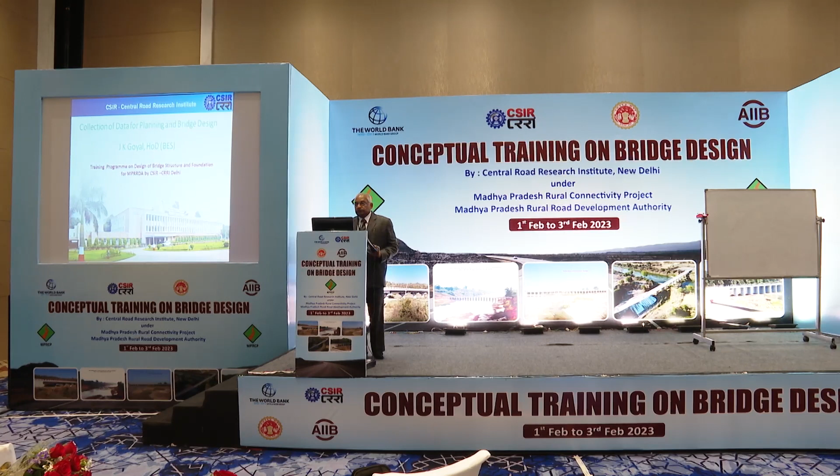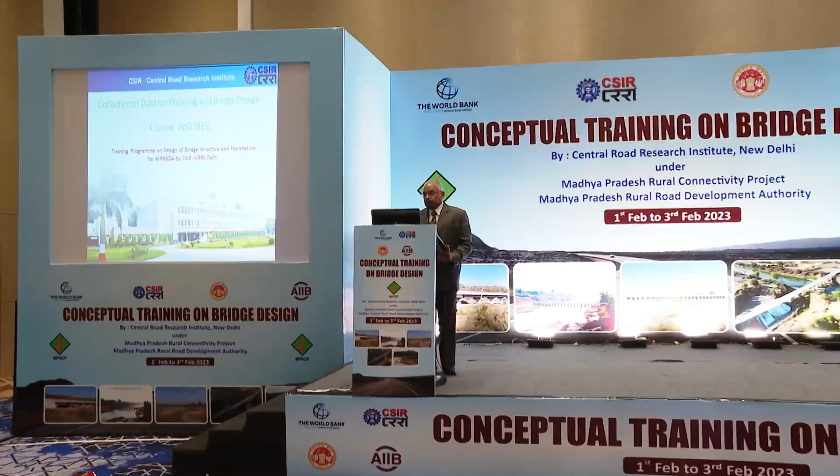Covered one lecture or overview. Basically, the course has been designed to cover the various aspects, and the first session, which is normally the introductory session, has to be on the overall awareness about bridge design and construction. And you will find other lectures also which will be dealing purely on the merits of design and analysis of the bridges. So these two lectures are considered with a view to familiarize you with the overall concept of bridge design and construction.

So I just would like to supplement the query which was raised by one of the participants, that where we use composite construction. Of course, faster construction is one motive, and there are other techniques also which allow you to make faster construction, like segmental construction, launching. There are various launching methods which I will be covering tomorrow. But composite construction is also used to economize the cost at some point. So there are various advantages. We cannot just confine to one parameter.

So composite, of course, is because nowadays we are going for FRP material. FRP material is the future material where you will see a lot of composite construction having the FRP, steel, concrete sandwich. So with that view, composite construction has to be seen.

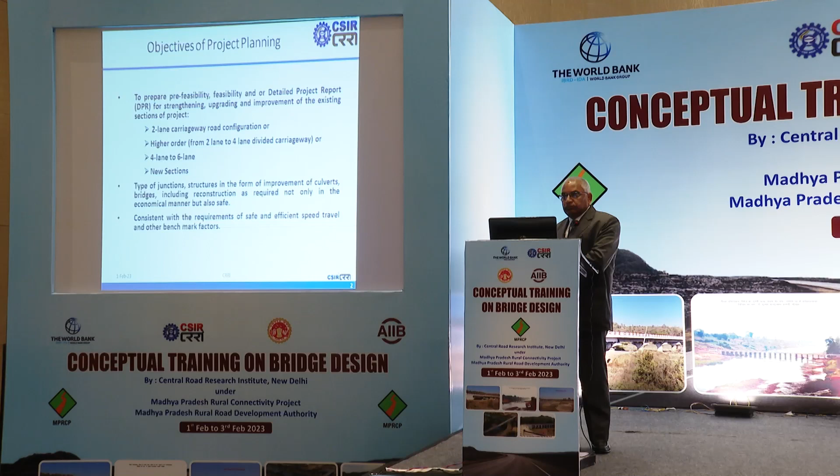So thank you. So my topic is basically the project planning for bridges, and it encompasses various segments of the DPR. You are all practicing engineers. You very well know how DPRs are prepared, but we call everything a DPR, and this is not the DPR. There are three stages in project planning: first is pre-feasibility, then feasibility, then DPR.

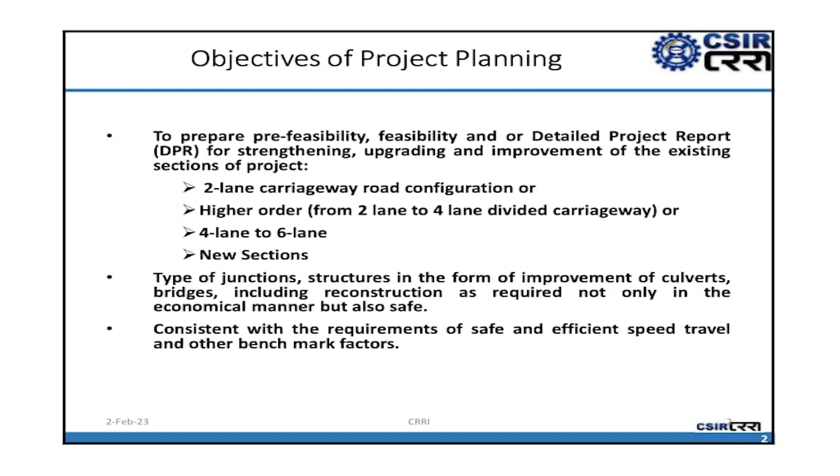So if we have to distinguish between them, you have to be very sure in your mind, because everybody calls it a DPR. This morning also we saw the ACS was saying DPR. But we should be very, very clear what we are expecting from the project preparation. It has got three distinct stages, starting with pre-feasibility. Suppose you have to construct a road of 100 km or 50 km, and we are not sure whether we really have to construct a road, or really go for an expansion plan.

So pre-feasibility just covers the origin point, destination points, existing features of the road, and a rough cost estimate on the basis of your thumb rule. If you have a bridge, you see the existing bridge is not sufficient, I have to discard it, just on the merit of your visual inspection, no investigation, nothing. Just go to the site, make some visual observations, see your urban areas, and you feel, look, expansion is not possible, we have to create a bypass here.

So you are not deciding the length of the bypass, but you simply decide, okay, this is an 800-meter town, so I will roughly need a bypass of around 1.2 km, 1.5 times the length of the existing road. So with all these features, you prepare a pre-feasibility report without any geotechnical investigation, without any traffic study, without any actual cost estimate.

You prepare a pre-feasibility report and go to your authority and say, look, if this road has to be done, my pre-feasibility says that the 50-kilometer road will have some bypasses of around 5 to 6 km, some realignment. These are very old existing bridges, so we need to repair or reconstruct them, and my estimate would be around 200 crores based on the per kilometer cost. So that is pre-feasibility.

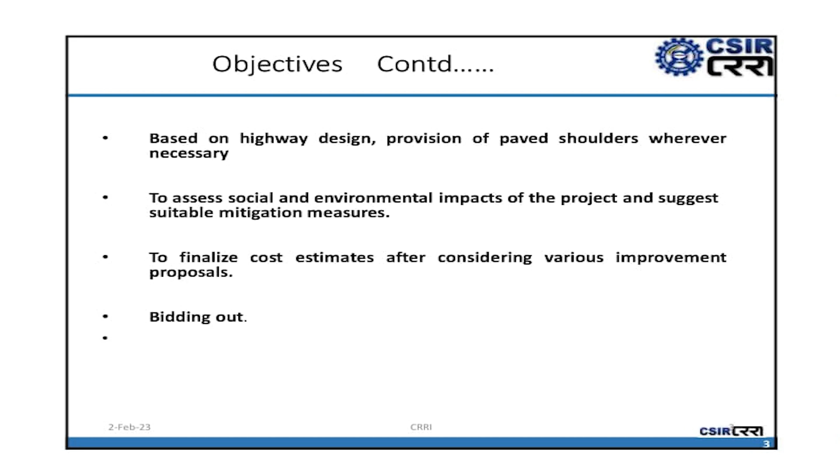This is the essential objective of the project planning, and whatever you plan, it has to be done in a very economical manner and consistent with the requirement of safe and efficient speed travel and other benchmark factors. Benchmark factors are basically your level of service, what level of service you want to decide, whether you want to plan other ancillary facilities. So you decide on certain benchmarking. Like you would like to have a toll plaza, then whether you would like to have an automatic toll plaza, the refinement in your level of services.

Then based on highway design, provision of paved shoulders wherever necessary, that you provide. You assess the social and environmental impacts, whether this is going to create any social hazards, environmental impacts. I'll tell you a very interesting study done after completion of Golden Quadrilateral, what is the social impact it has given on our urban landscape. So that's a very important study. You can just look at the National Highway website.

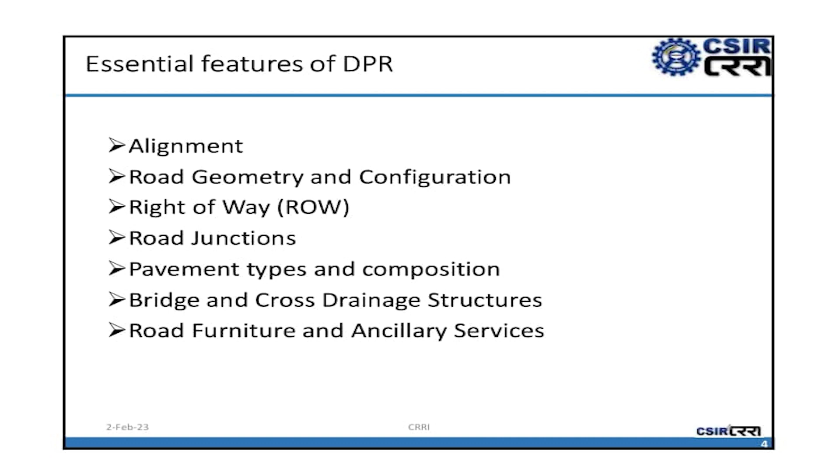So essential features of the DPR, I explained the feasibility also. In the DPR, basically you have the alignment, your alignment should be frozen, the basic alignment along the main line and along the bypasses. So there are two alignments that we have to see, first on the course of main line and another on the course of bypasses or realignments.

There is a difference between realignment and bypasses. Realignment means wherever you have to just tweak your geometry. Your geometry is not correct, like your rural roads, you find at several places that roads are good, but your geometry is not correct.

You are not feeling comfort in driving on the rural road. That is the basic flaw which I see from the point of view of highway engineers, or looking at it from the national highway point of view. In rural roads, the basic problem is your roads are good, but you have so many curves. So if you improve upon it, you can do it everywhere.

You cannot go for bypasses because you have to acquire new land. But as far as possible, you have to remove the reverse curves. You have to see whether the riding comfort is improving or not. So alignment is a very essential feature of any DPR.

Road geometry and configuration, whether it is 2-lane; there is a concept of 3-lane also, which I will not cover here because it's not popular in India. An additional lane is created just to overtake, but it has to be done at a place where there is strict compliance of the rules, which is not possible in India. So an additional lane is not given.

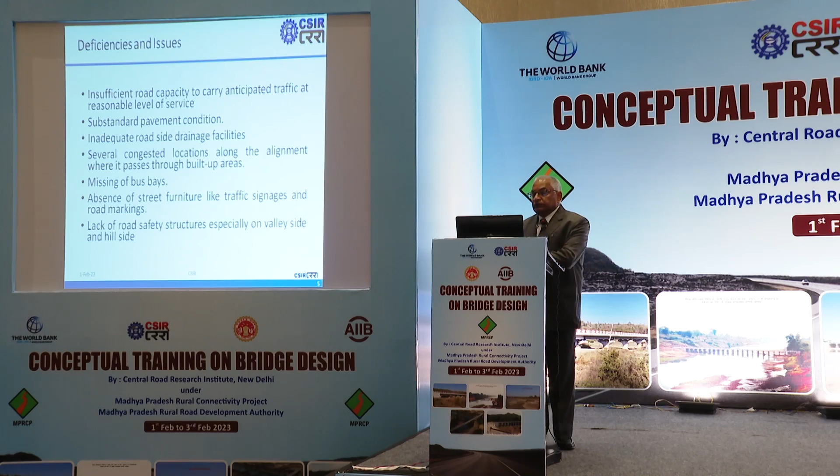Then the bridges and cross drainage structures, of course, are an integral part of any DPR. Road furniture and ancillary services: road furniture means signages, ancillary services means things like the toll plaza, truck lay-by, all these things. Then we also have to deal with the deficiencies and issues involved in making the detailed project report, or in project planning.

Basically, insufficient road capacity to carry anticipated traffic at a reasonable level of service. This is a big challenge on our national highways, because road capacity is something you have to look at. For example, look at urban roads. Urban roads already have something like 40,000 to 50,000 PCU. In Delhi, we have 2 to 3 lakh PCU traffic, and we have no capacity to expand.

In rural roads, when you are improving the road, you look at your capacity. You design for 15 MSA, 20 MSA; your traffic is about 2,000 to 3,000 PCUs. It is not even 10,000. But the moment you improve the road, this traffic is going to increase.

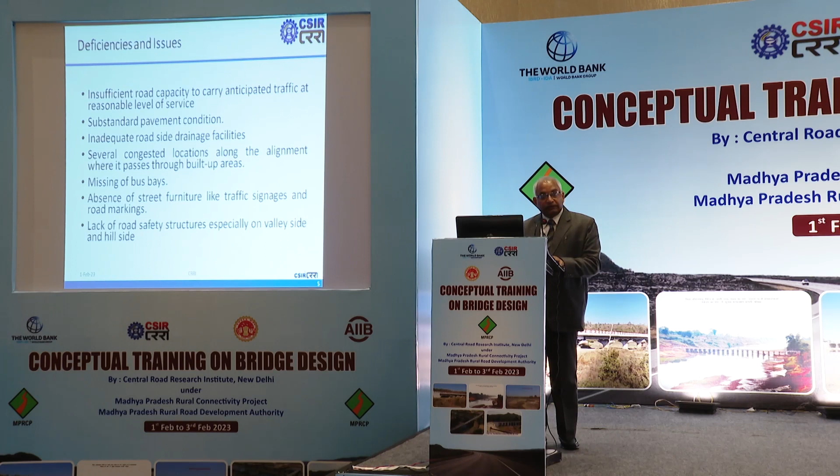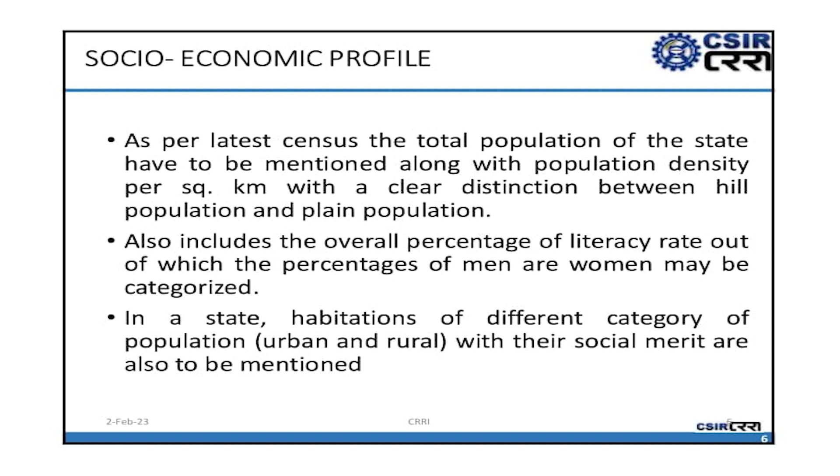And then we come to the socio-economic profile. Any DPR should consider this socio-economic profile. As per the latest census, the total population of the state has to be mentioned along with the population density per square kilometer. I don't know, you may be doing it in your DPR. And also include the overall percentage of literacy rate.

This is very important, because then you have to decide on higher grade of facility. If you have a good literacy rate, you can decide on good educational institutes in that area. So you have to plan your highway accordingly. If suppose the literacy rate is poor, then you have to decide for average type, like primary school, middle school kind of thing. So that way your DPR has to consider all these socio-economic issues in the overall built-up environment.

In a state, there is habitation of different categories of population. I should not say much in this regard, but just think of a situation where you have tribal population, urban population, and other kinds of population, and their habitation and lifestyle is different. So whatever project you plan, you must plan with the taste of the

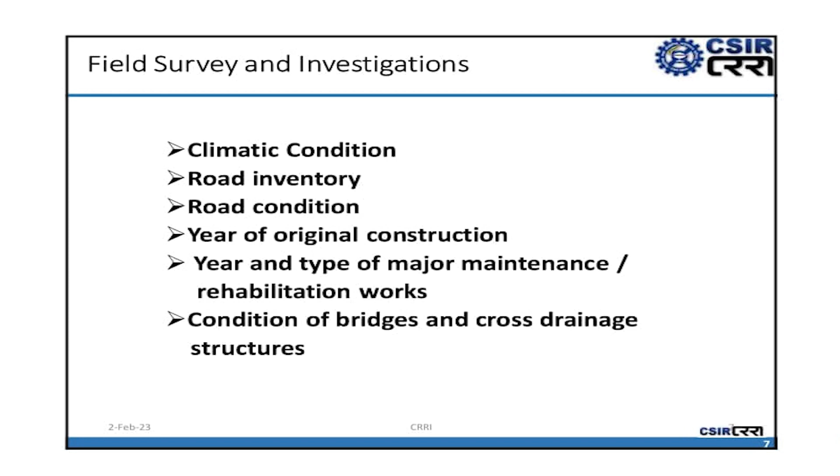I'll just touch upon some field survey and investigations, like climatic conditions. It's very important because any DPR should cover this. We have already talked about it. Now you see the climatic situation, road inventory: whatever existing roadside furniture, whatever roadside assets are available, cover in the road inventory. Road condition, of course, we have to record.

As a matter of record, we have to have the year of original construction. It is very important in the case of bridges, because bridges are normally designed for 100 years. 100 years is a very, very theoretical word. We say 100 years. How many years will we live? We say simply 100 years, but we don't live 100 years. Similarly, your structures.

There are many structures which are more than 100 years old, still surviving. There are many structures which are only 25 years old, not surviving. And we are not designing a structure for 100 years. Who says we are designing a structure for 100 years? It is in the code only. There is no criteria that this will last for 100 years. Nobody has seen 100 years, 75 years, 60 years. But it is a theoretical concept in our mind that, okay, flexible pavement, 20 years, rigid pavement, 30 years.

But if your 30 years traffic has exceeded in 10 years, your road is infructuous in 10 years. That road will not last for 30 years. Similarly for bridges, if your bridge is having high density traffic, it may not last for more than 30 years. Quality of construction is not good, it may not last more than 5 years. But we have to really see that whatever we construct should meet the minimum design requirement.

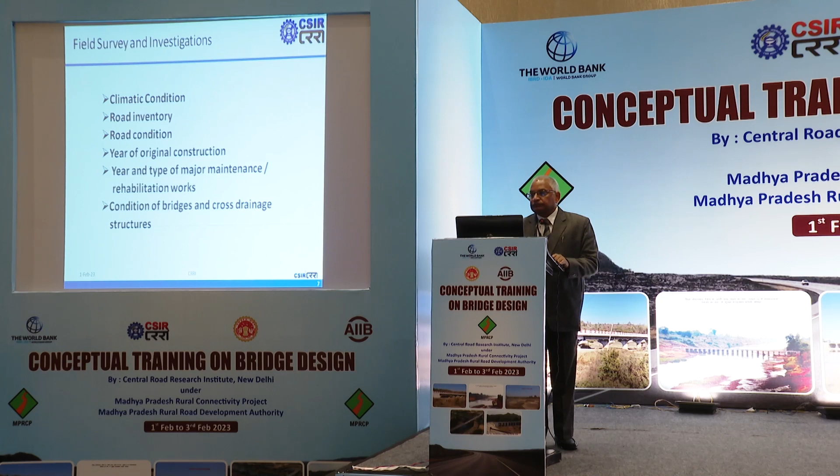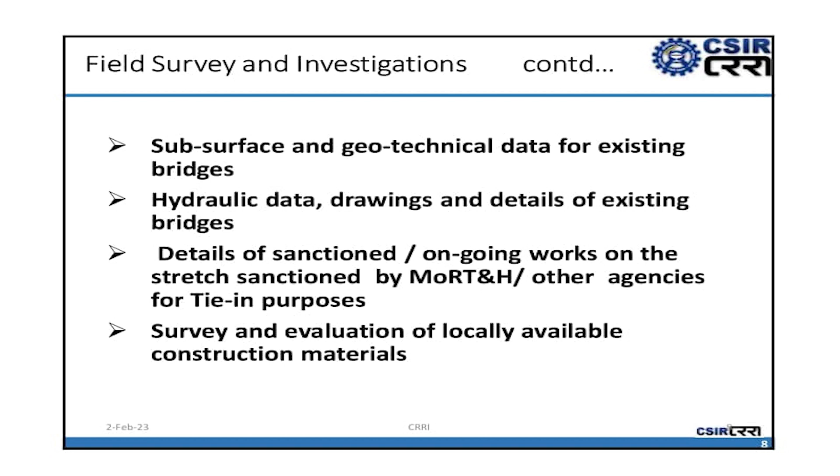Then subsurface geotechnical data for existing bridges. If we talk about bridges, we have to collect the geotechnical data, hydraulic data, drawings, which will be dealt separately. Details of sanctioned ongoing works. This is from the perspective of National Highway. Survey and evaluation of locally available construction material. So this is a very important aspect. Wherever you construct your highway, your DPR must really consider the availability of local material.

Like if you go to Rajasthan, you have the slurry available. If you go to some industrial area, you have the fly ash power plant available. You consider fly ash as your basic input material. Somewhere, if you have some laterite mine available, consider that mine. Mix it, stabilize the soil, that kind of thing. In MP area, you have a lot of black cotton soil. So you have to also see how we can work on black cotton soil. Especially in Malwa region, Bhopal region, Hoshangabad region, you have a lot of black cotton soil, BC soil. So this is a challenge for you.

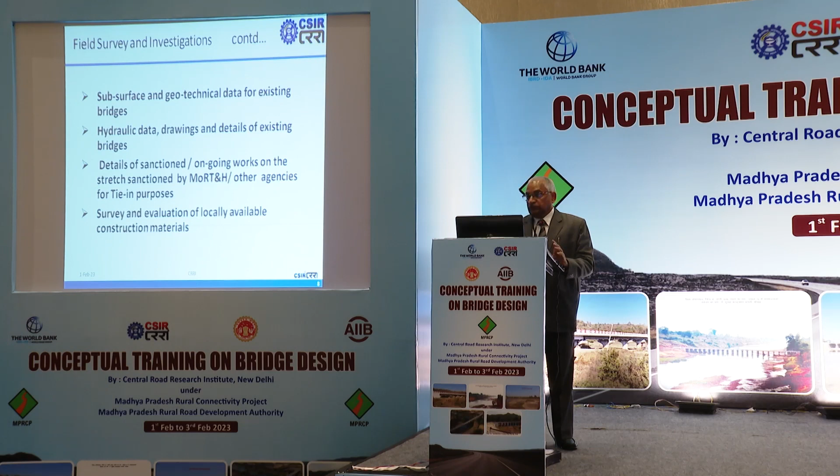Then any DPR should consider the scope of work, which basically includes the construction of new structures along the existing alignment, the construction of new structures along sections of new alignment, and rehabilitation of existing structures. For the bridge DPR, I'm talking of bridges now, for the rehabilitation of existing structures, you have to examine the existing condition, widening and repair of existing structures. In National Highway, we go from 2 lane to 4 lane. Similarly, in your rural roads, single lane to 2 lane. So how to widen those structures? You have to consider whether we should utilize the existing material, the existing infrastructure, or we should replace it.

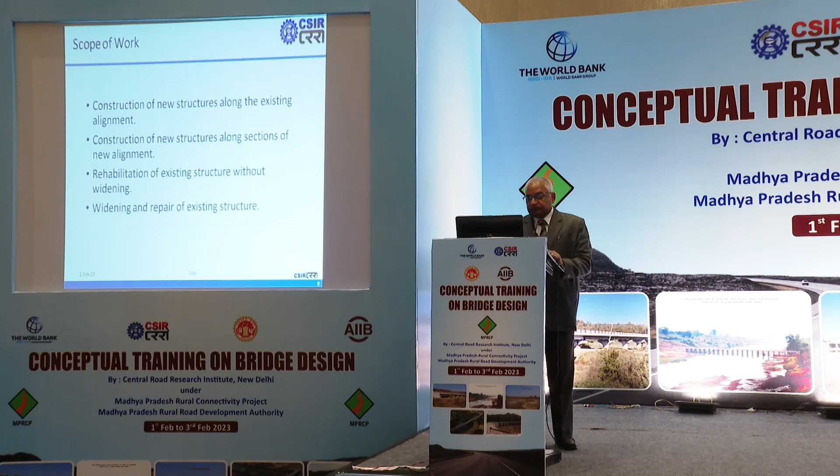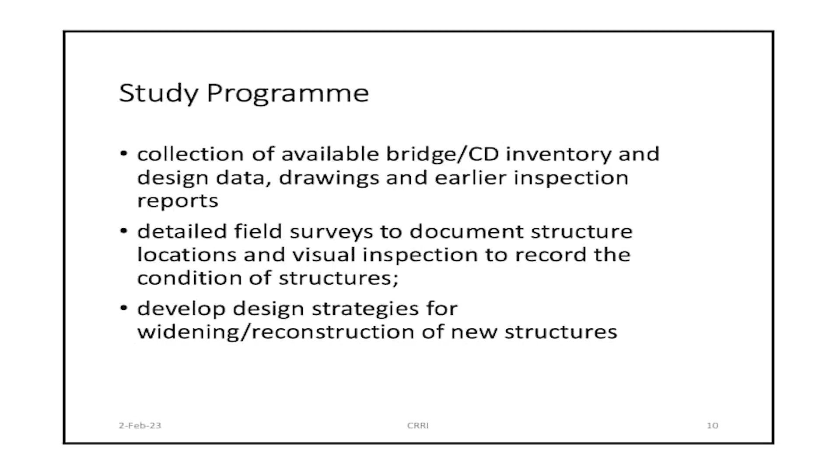So a study program should include collection of available CD inventory and design data, drawings, detailed field survey to document structure locations, and visual inspection to record the condition of a structure. There are standard formats available to record the existing condition. In fact, if you look at the AASHTO code, the American code, they have standardized everything. Unfortunately, in India, we have not standardized. They have given a code to everything, and this is uniform all across the country.

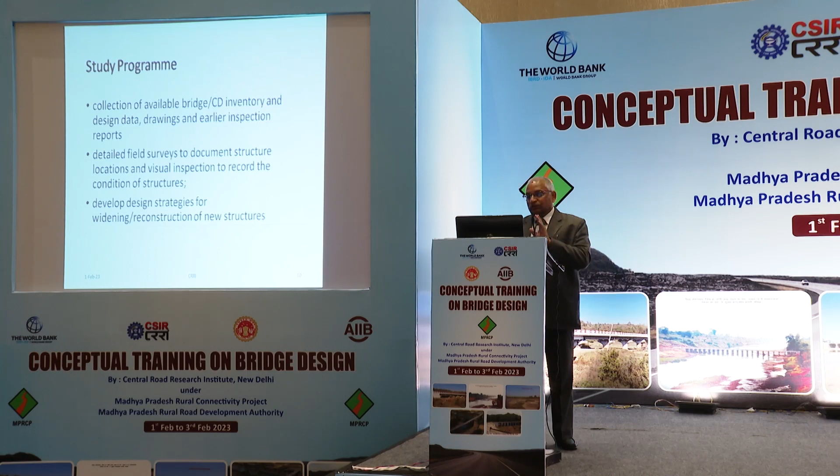Suppose you have a parapet wall, bridge parapet. So you define P102. This P102 will remain the same all over the country, irrespective of state, irrespective of anything. So that way we have to standardize all the inventory, so that anybody who comes next time can simply say, okay, P102 means this. He can immediately connect with it. Then accordingly you develop the design strategies, whether to widen or reconstruct the new structure.

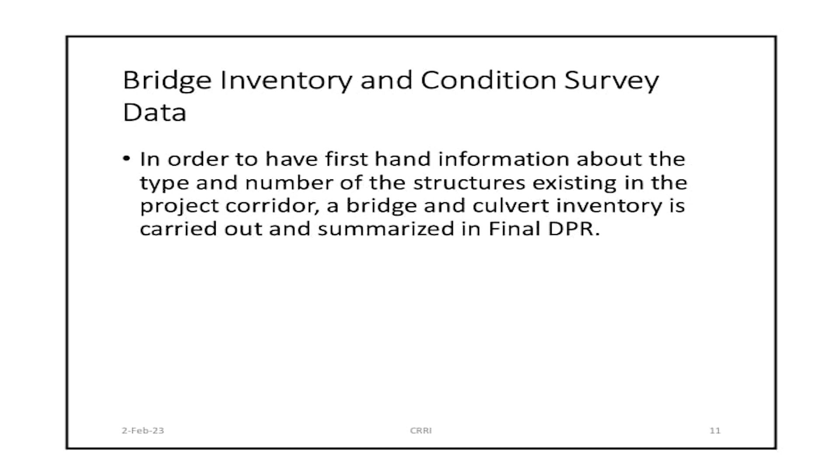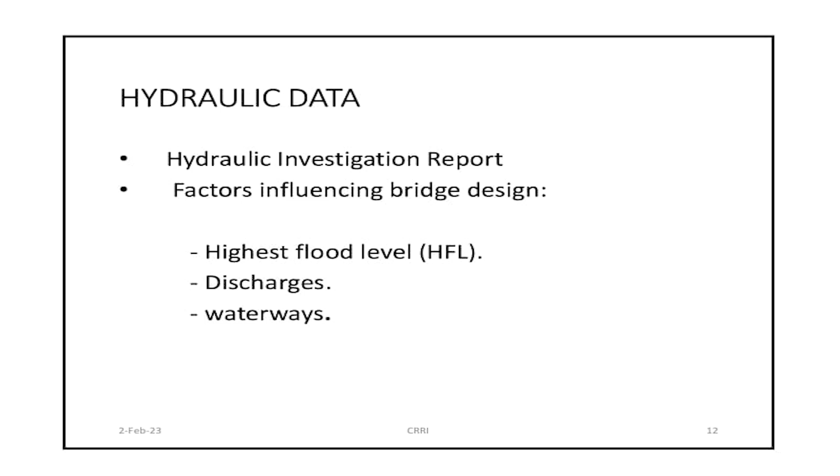Hydraulic data, of course, the hydraulic investigation report is very important, a very essential feature of the bridge. Factors influencing the bridge design are basically HFL, discharge, waterways. These are the three principal parameters that we have to be sure are recorded properly.

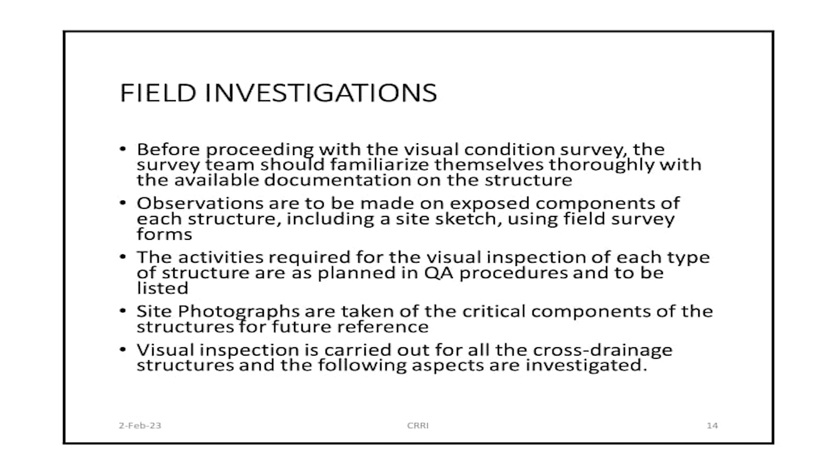Then for bridges, before proceeding with the visual condition survey, the surveyors should familiarize themselves with the available documents of the structure, the existing design; if it is available, you consider that design. Observations are to be made on exposed components of each structure: note down the condition, take the photograph, record it. These days you have the GPS phone, so that way it is easy.

Then activity required for visual inspection, for each type of structure, plan in QA procedures. And better to have a quality assurance plan. For anything that you start with, you should have a quality assurance plan. Site photographs for the critical components of the structures like bearings, like expansion joints, which you cannot access; nowadays we have drones available which can access the critical components of the bridge. So all these things you have to do under the field investigations.

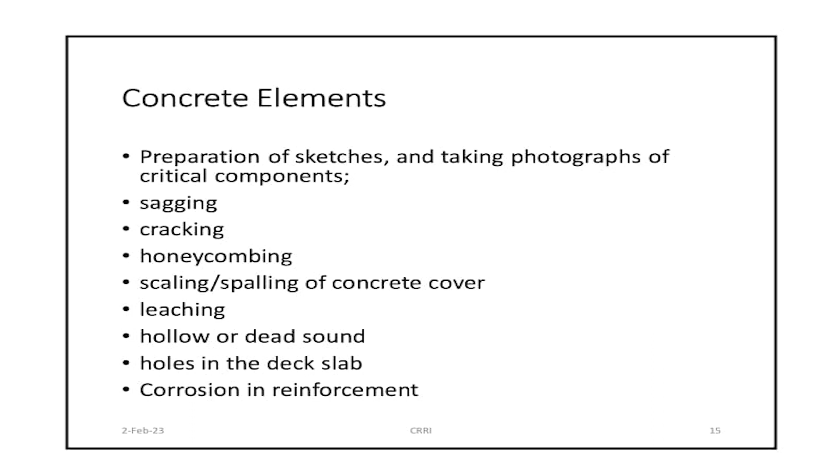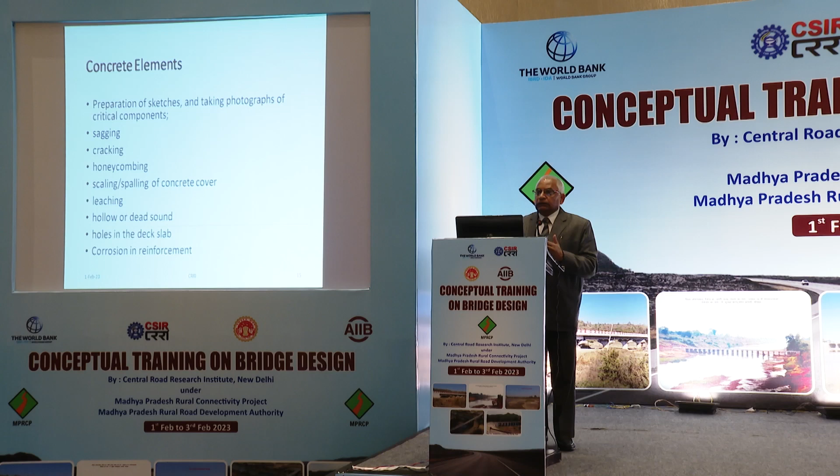Then corrosion in the reinforcement, it's a very, very common feature. If you do not compact concrete properly, if your cover is not proper; and our codes have also been revised. Earlier we used to have 40 millimeter cover, now it is 70 millimeter cover. Earlier we were not using galvanized bars, we were using simple bars. Now we are using galvanized bars. So you find a lot of corrosion in the reinforcement, and you can see the existing bar diameter has been reduced because of the corrosion.

Then steel elements; I was talking of concrete. There are steel bridges also. In steel bridges there may be geometrical inconsistencies because of replacement of a few sections. You can find ISMB 150, then immediately see ISMB 125 or 100 because of the cut and paste. Inspection of joints has to be done very, very carefully, because if your joints are not proper, if it is a bolted joint or riveted joint, over a period of time this joint becomes loosened, and your rivets or bolts

fall down, you have to look for that, because this is the most critical problem we find in all the rail over bridges. Wherever we go for inspection of rail over bridges, which are composite construction, you find a lot of bolts are missing. It is our misfortune that we don't go and see there. If you just go to any ROB in Bhopal or near Bhopal, take a case study. Just go, 5 or 10 engineers, and see. You will find a lot of connections, a lot of bolts missing, just because the bridge is continuously vibrating.

Paint defects: there is a whole chemistry behind it; whatever paint spray we are doing has a certain life. So you can see the defects, corrosion of course, and corrosion leads to sectional loss. This is very detrimental to the health of steel bridges if your section is losing the desired width or depth. Then missing elements. There may be structures where one whole element is missing, like bracing. You go and you don't find bracings there, which are very important.

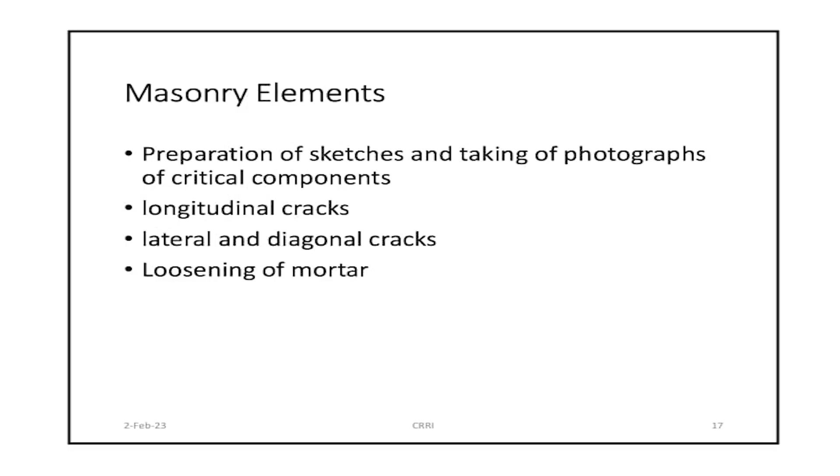And masonry elements, you just take the sketch, prepare your photographs. You can see longitudinal cracks, lateral and diagonal cracks, especially in arch bridges, loosening of mortar. All these defects you can see in the masonry elements. So these are the 3 elements, concrete, steel, and masonry, for existing bridges.

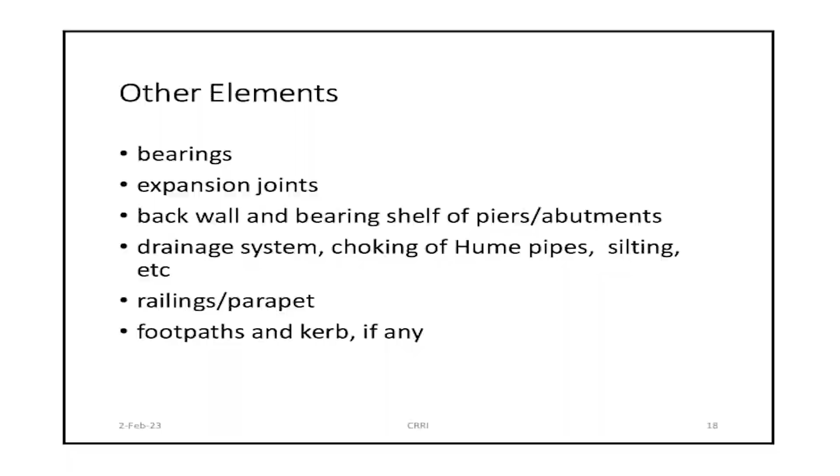Other elements, of course: bearings, expansion joints, back wall, retaining wall, drainage system, choking of Hume pipe, silting, railings, parapet, footpath and kerb. These are basically ancillary components of the bridge, but you have to record each and every component in a very careful manner, because everything has its own merits.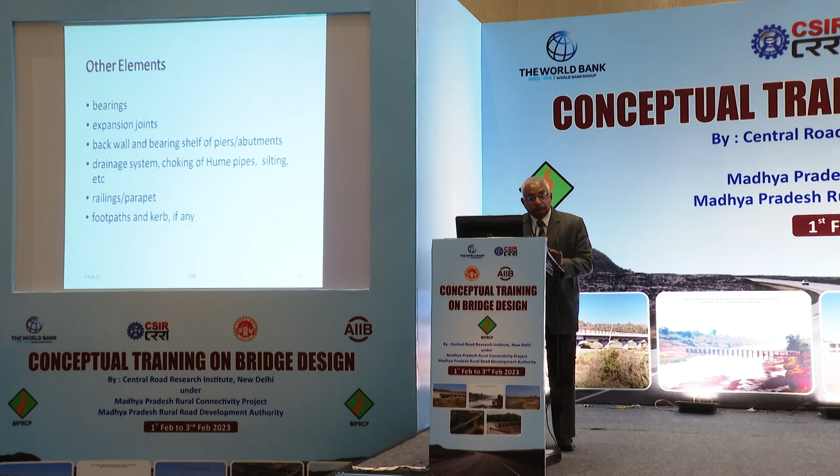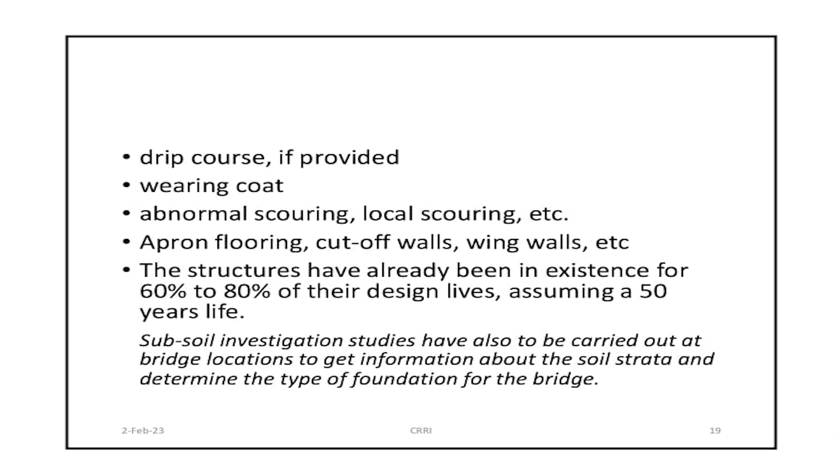Then, of course, the wearing coat on the bridge, abnormal scouring. If it is a high flood bridge, you can see the flash flood. In case of flash flood, you can see the scouring. Nowadays, scouring is also happening because of unauthorized mining.

This mining has become a major issue, because nobody is paying attention to it for certain administrative reasons. But mining is one thing which is spoiling your entire infrastructure. Whatever infrastructure you create, the mining people come and do the overloading, and your existing road network is getting defunct. Same way, if you go to rivers which have high pebbles, like the Chambal river, which has a lot of good sand, you find mining happening everywhere, unauthorized mining.

Mining is a good thing, but it has to be done properly. If it is done scientifically, it is a boon to the river. If it is done unscientifically, then your entire bridge is going to collapse. You find all the scouring, all the mining taking place underneath the bridge. I have seen at many locations where you have a dharamkata underneath the bridge. Government dharamkata. So this is very detrimental to the life of the bridge.

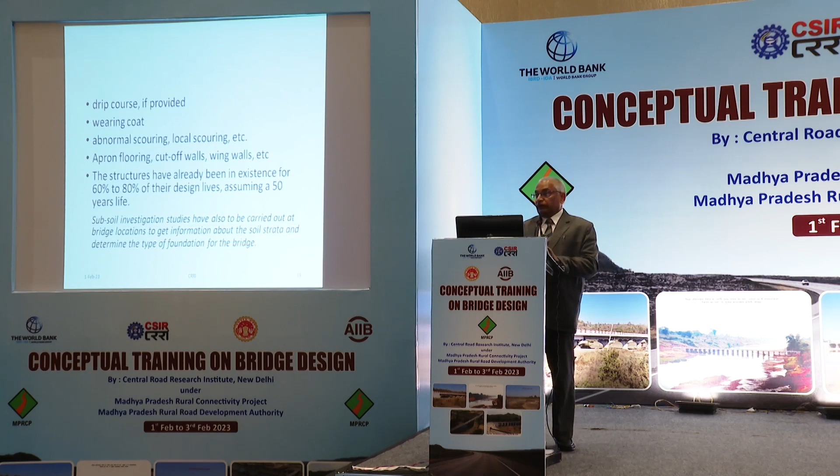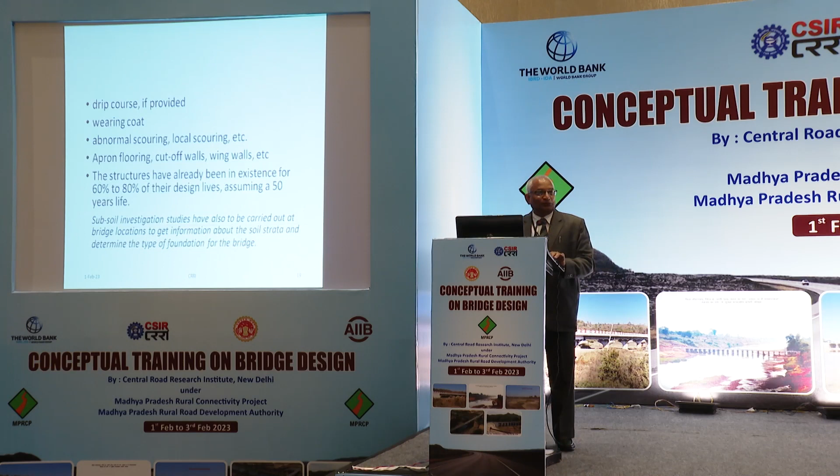With scouring, even if your bridge is very good, your superstructure is absolutely fine, your bearings, parapet, bearing course, everything is fine and well designed, if there is scouring and there is a tilt, you have no option but to replace the bridge. There are many examples. There is no dearth of examples.

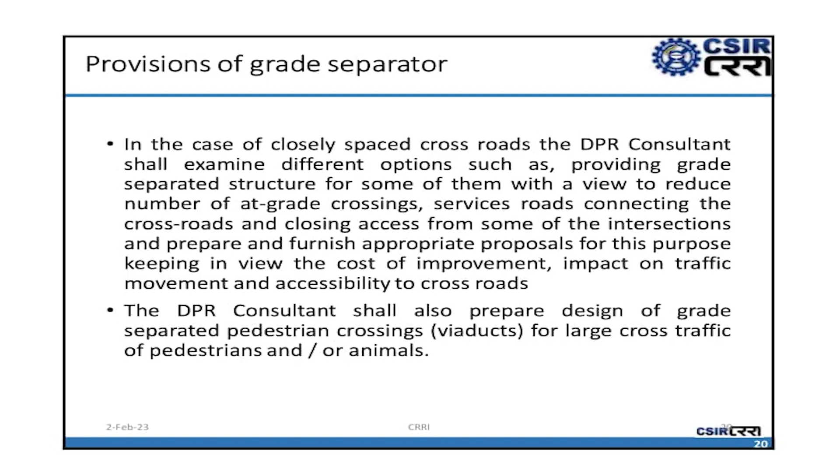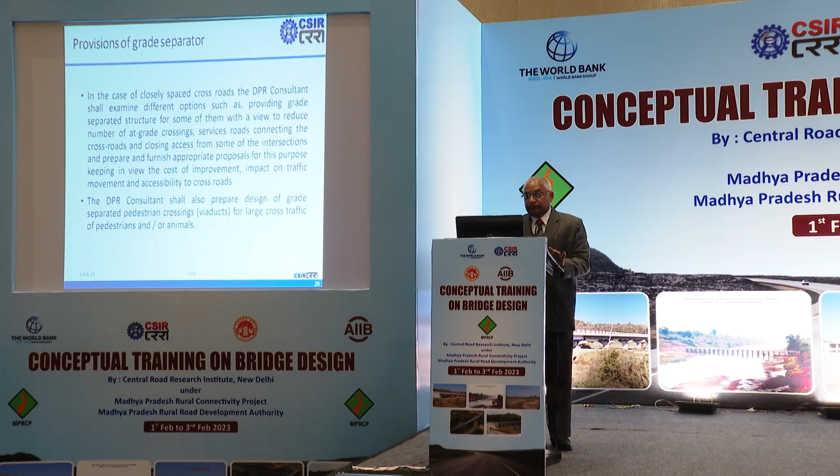Then, of course, in a National Highway DPR, to segregate the traffic we have provision of grade separators, which lead into the various design aspects of the bridge. So we have to look at the choice of at which point we want to divert the traffic for service road, for cross road, for closing access, whatever it is. Then for pedestrians, viaducts, all these things we need a grade separator, trumpet junction, like you have on national highways.

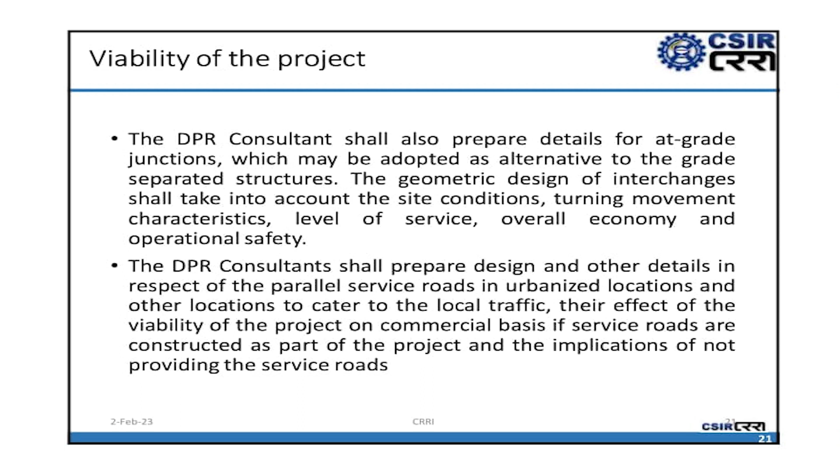Then the viability of the project. When you have done all this engineering, you have to see whether the DPR which you are preparing is viable, whether the government has got money or not. So for the DPR consultant, one of the objectives is to prepare detailed at-grade junctions which may be adopted as alternates to grade separator structures, and geometric design of interchanges. So you have to see whether the project is viable.

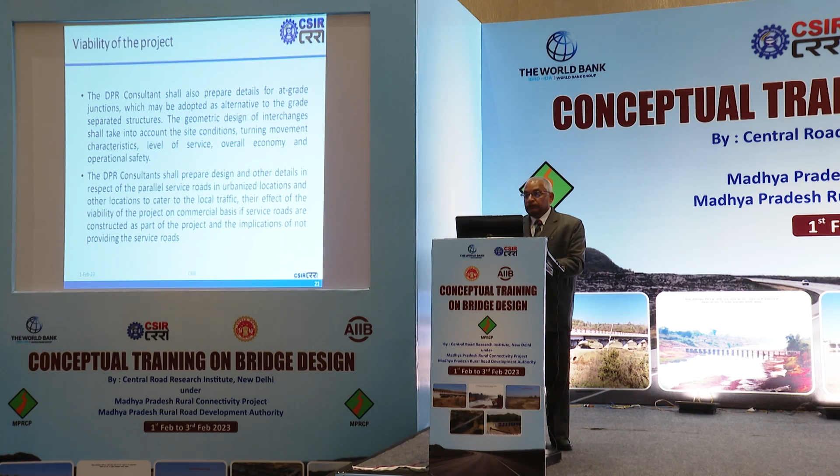And viability comes from the economic analysis. Assess the capacity of the existing road and the effects of capacity constraints on vehicle operating cost. Vehicle operating cost covers a lot of factors. It is not determined just like that. It covers a lot of economic factors: reduced congestion, travel distance, condition of the vehicle, traffic pattern, everything.

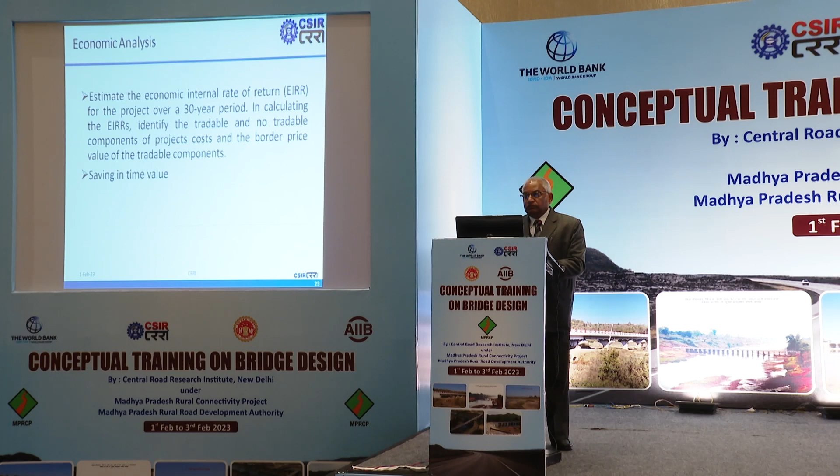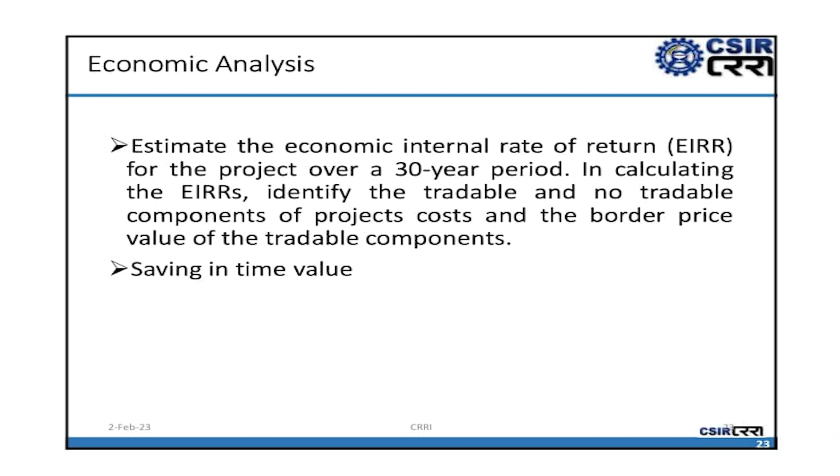Then we calculate the very famous EIRR and FIRR. If you go to any bureaucrat, he will ask, what is EIRR? What is FIRR? Any chief engineer going to his boss will be asked, what is EIRR? What is FIRR? So you have to explain what your cost is, what rate of interest you consider, what the NPV, net present value, is, and how your investment will be returned. Then they decide the mode of execution, everything.

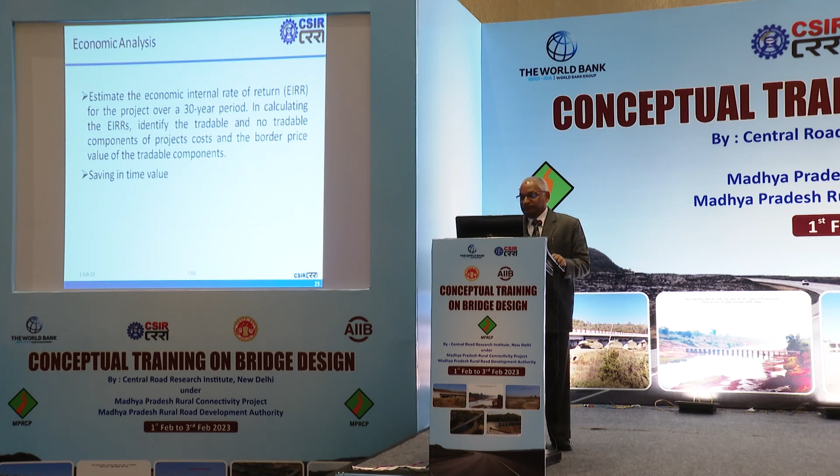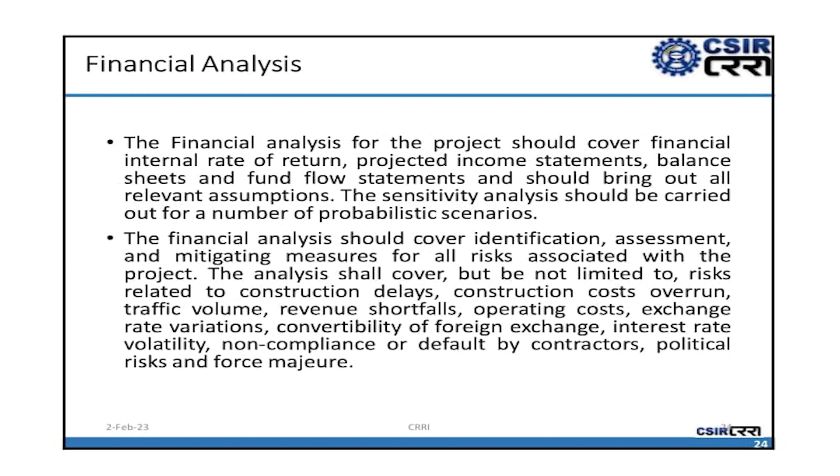Then financial analysis, which is the job of a financial consultant, but as technical people we give input to them: this is my cost, this is my traffic, this is my tollable traffic, this is my untollable traffic. All these parameters you give to the financial consultant: the rate of toll, the willingness to pay the toll, the traffic leakage. All this comes under financial analysis. Then financial analysis will decide whether this project is viable under a particular mode or not.

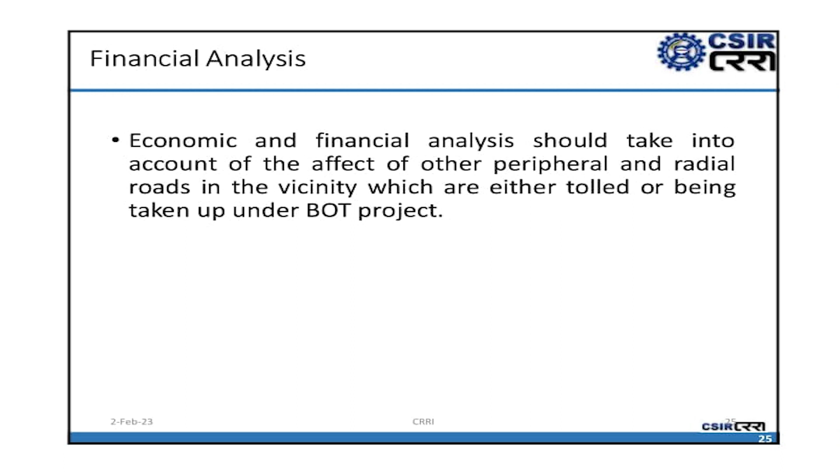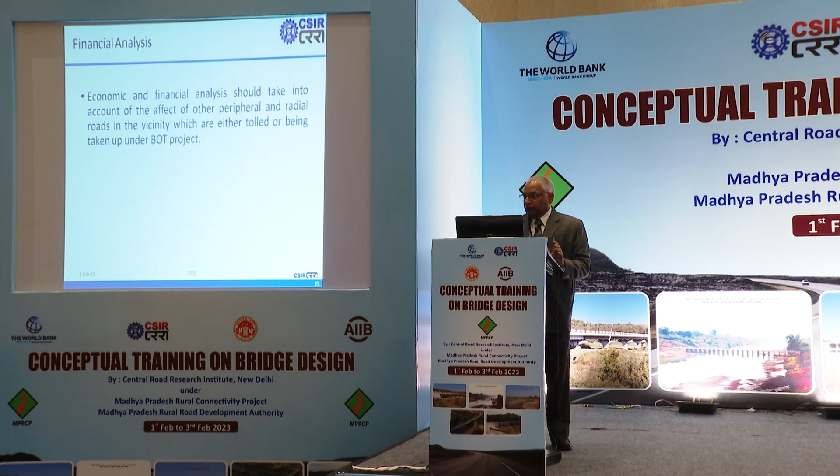That is how they decide whether this project will qualify for BOT. In BOT, build operate transfer, we have considered a 40% grant. If your project cost is 1,000 crore, the government is willing to pay 40%, 400 crores. If it is not viable under toll and the gap funding comes to more than 40%, then the project is not qualified. That means you don't have commercial traffic, you don't have much toll available on the road.

Then you go for annuity mode. Annuity mode means your investment of 1,000 crore will be returned by the government in 6-month installments, covering your original construction cost, investment, and the interest on your investment, NPV value, and whoever quotes the lowest annuity will get the project.

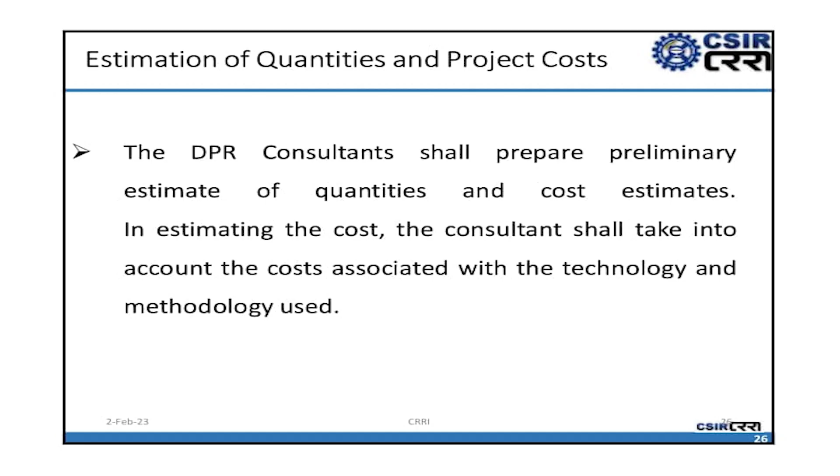Now we are having hybrid annuity project. Hybrid annuity project, these days in NHAI, they are awarding most of the projects on hybrid annuity, where you have gap funding as well as the annuity. Both the things are sandwiched together.

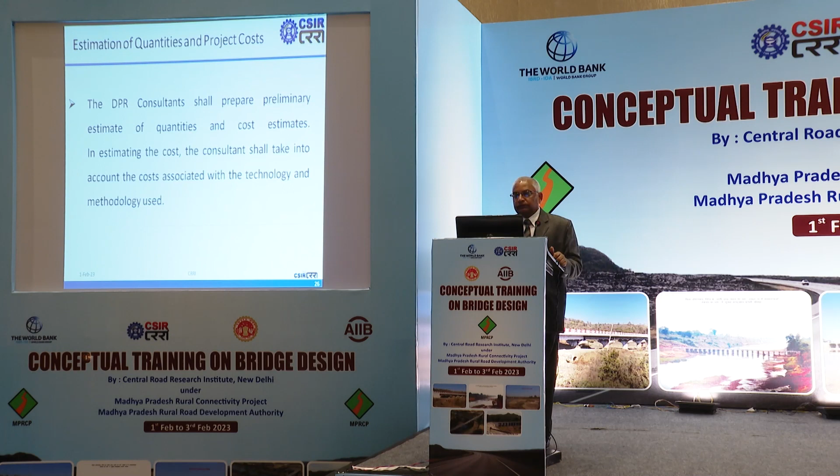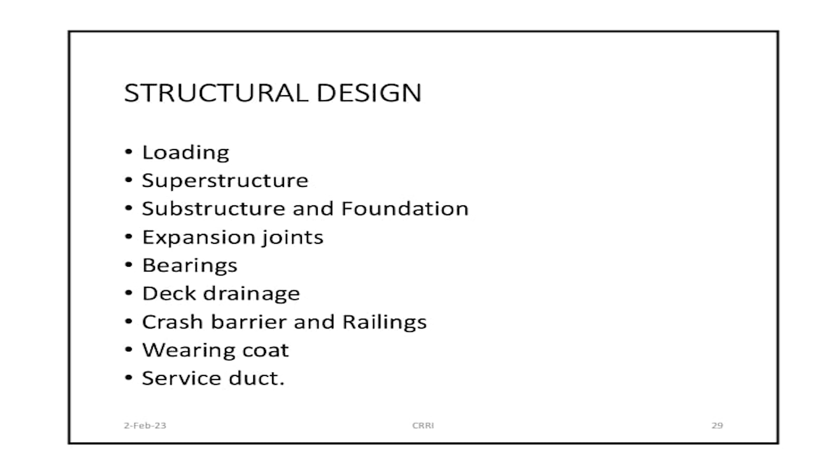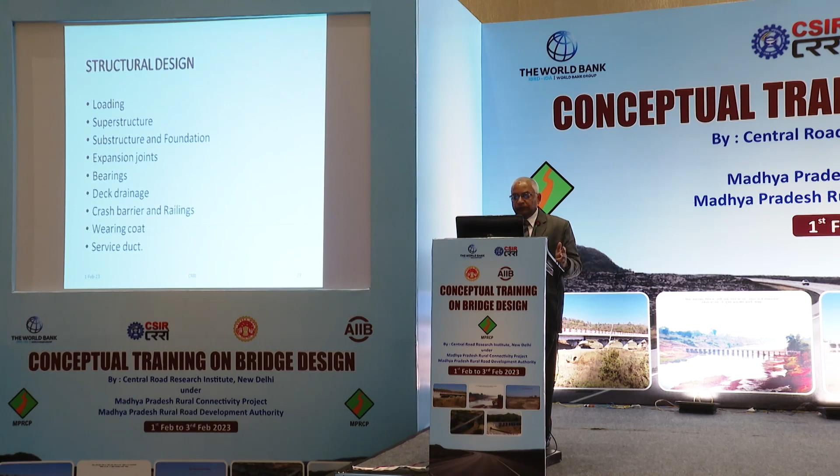This I have already covered. The structural design, I just don't want to cover because it is already covered and it will be covered subsequently in your lecture, so I don't want to repeat all these things. But of course, structural design, loading, expansion joint, bearing, deck slab, basic input for design, everybody knows. This will be covered in your subsequent lectures, so I don't want to elaborate here because otherwise you will see the CRRI is repeating their lectures after lectures. But these are basically the basic requirement.

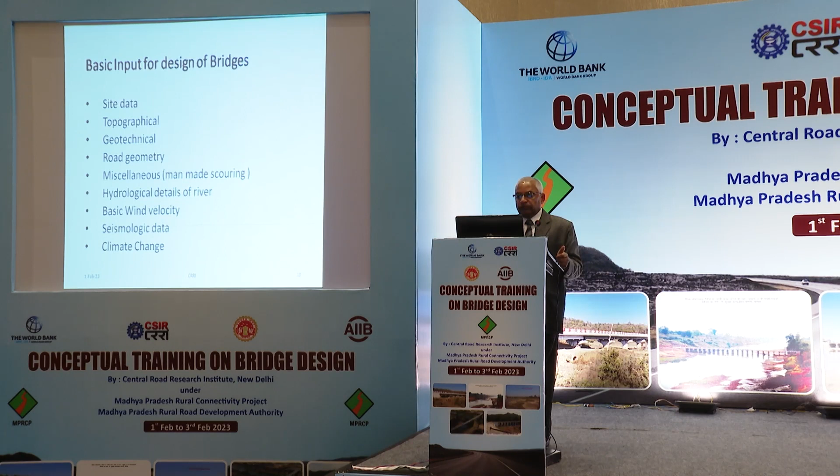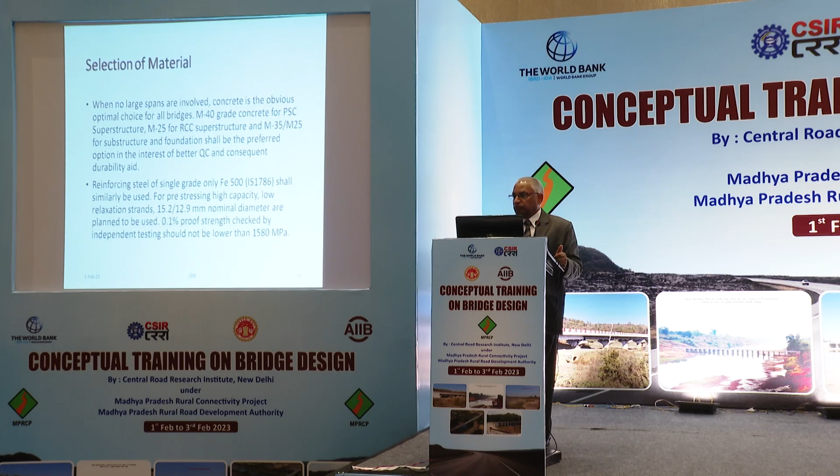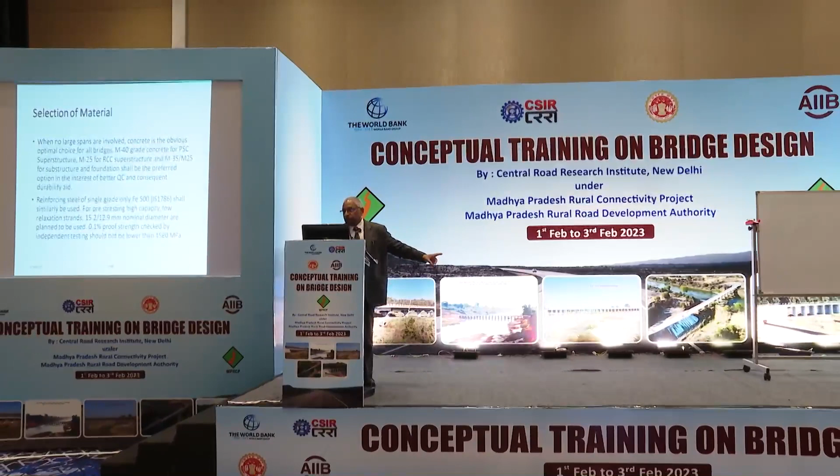I just skip. Yeah, this is important, selection of material. If there are no long span structures, for bridges particularly, I can see those photographs. You have invariably all the short spans. But you have to see whether this short span is viable or you can reduce one span here. If you look at the photographs here, you can see it is only 3 meter, 3 meter, 3 meter, like that. You could have gone for 6 meter, you could have gone for 15 meter, but only after proper analysis. Your DPR consultant should have done the job. Whether I should go for 3 meter, 6 meter, 10 meter, 15 meter, whether I can reduce the cost of superstructure, whether I can play with the design of foundation.

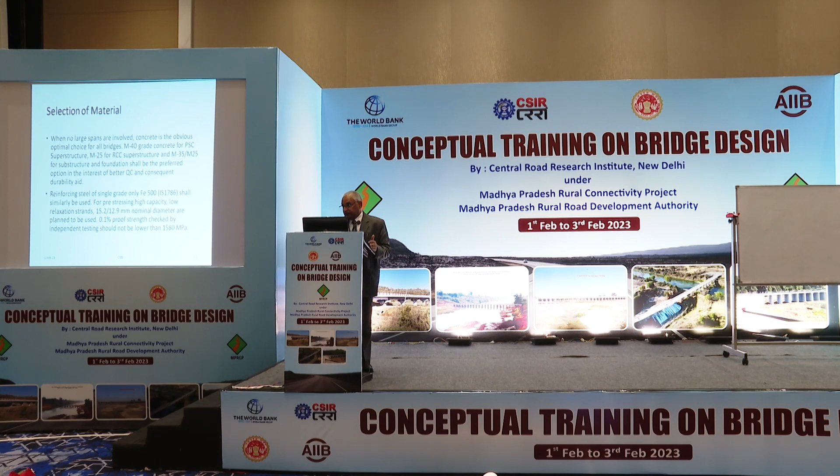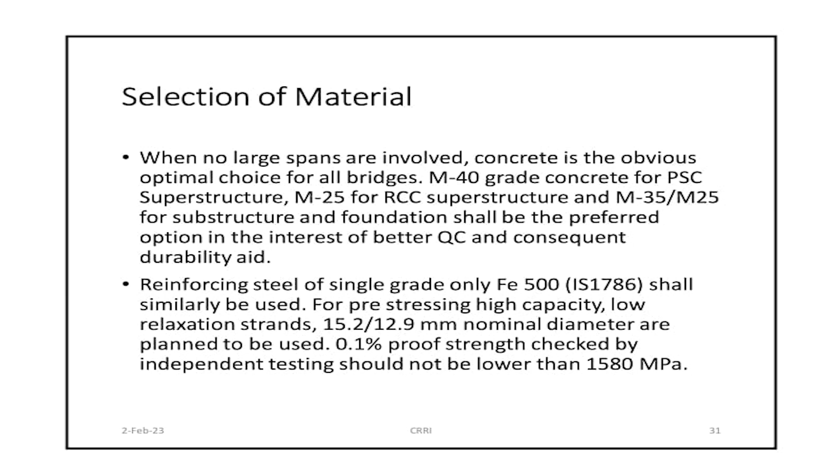I have reviewed a lot of DPRs, like in Kerala state, you have a lot of backwater. So there we had a tiff with the consultant. That is where the minds of the departmental engineer should come into play. The span arrangement is very, very important, whether I should consider this span or not. Why not? Question the DPR consultant many times. Why only 3 meters? Why not 6 meters? Why not 10 meters? Give me the alternate design. Give me the alternate bill of quantity, estimate. I'll work out. So that is where your role comes. It is not like whatever is prepared, just go for tendering.

So if you go for higher grade these days, you take the advantage of higher grade material available, you take advantage of steel, you can take advantage of pre-stressed concrete. So if you improvise on the choice of the material, you can always go for better span. Better span means better economy. The cost of bridges you can always reduce if you look at your selection of material very carefully, and if you look at the design very carefully. You don't have to design, you got the consultant for this. You only have to tell, look, I need at least 3 options. I don't want 3 meter, I want 6 meter or 10 meter, 15 meter. Do some iteration, do some hand calculation.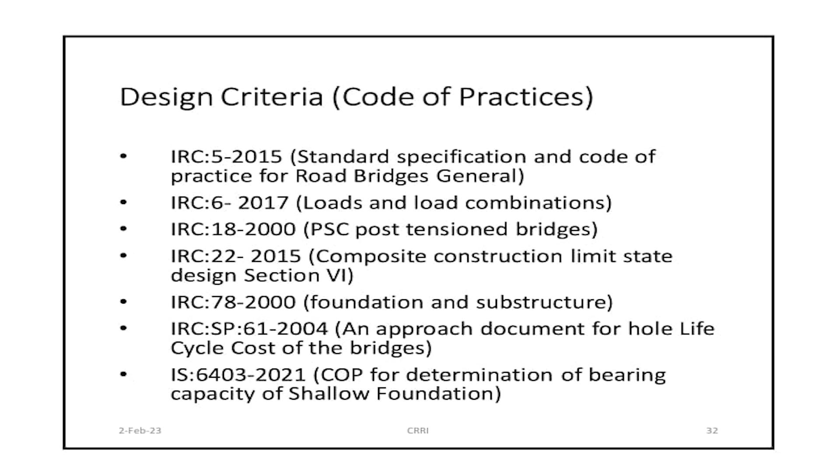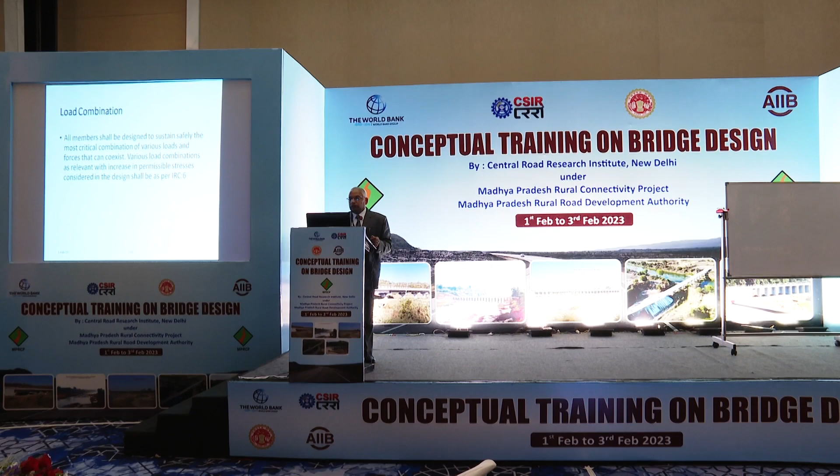Design criteria, of course, has been covered by Dr. J K Goyal. So these are the codes available. Everybody knows. I don't want to read that again. Load combination, of course, we have to design the structure considering load combination. If there is earthquake, we have to consider earthquake, wind, all these loads we have to consider. This is the analysis. Substructure and foundation will be dealt with separately, so I don't want to cover here.

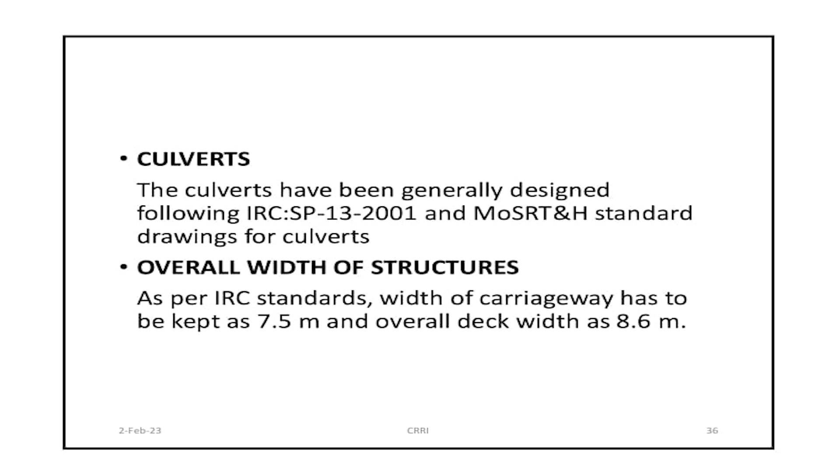Repair and rehabilitation will be covered separately, but I have already given you the idea of how to inspect the bridge and then how to plan the repair and rehabilitation methodologies. Because all the bridges which we consider can be repaired. There are many bridges which we see on the national highway which the DPR consultant simply ignores and says, look, yaar

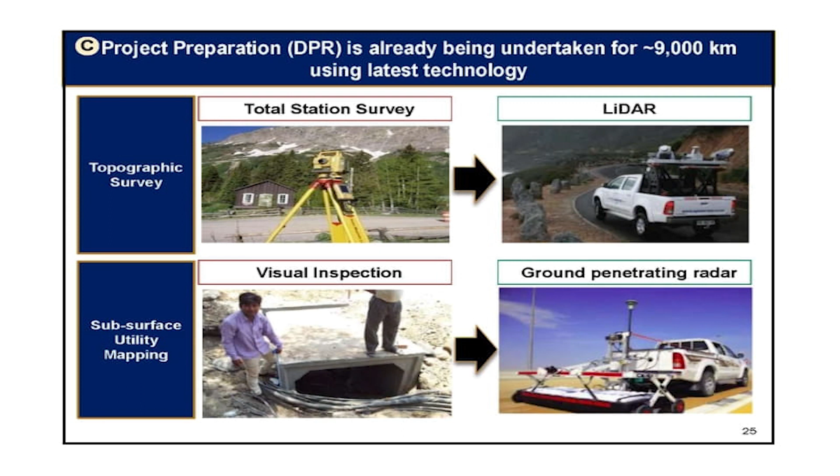So I just want to skip all these things because this will be covered. I'll go for the latest tools and techniques that we use these days. Topography survey, of course, now the things have changed. You have all the electronic material. Like in the Bharatmala project, we have used all these latest devices.

Like LIDAR, it is a laser-based LIDAR. Are you using it in your network or no? Sir, you are using LIDAR? No. In National Highway, it is compulsory now. For Bharatmala, it is compulsory because this is a system which will give all the topographic features just by mounting on the vehicle. So you can cover 100 kilometers in a day. So you have all the road inventory, road condition, all the road features like curvatures, except the road condition

which you have to cover by the FWD or other road investigation, or bridge condition. All the essential geometrical features, road condition, inventory, everything you can cover with the LIDAR. You can even fix your alignment also. But it is not the replacement of visual inspection. Visual inspection means your judgment has to be there.

Then ground penetrating radar, basically to locate the utilities and existing condition of the pavement. Then we have the network survey vehicle, which is used mostly for the maintenance and strengthening of the pavements, followed with deflectometer to assess the condition of the existing pavement for the design purpose, and the mobile inspection unit, which we are showing in the middle.

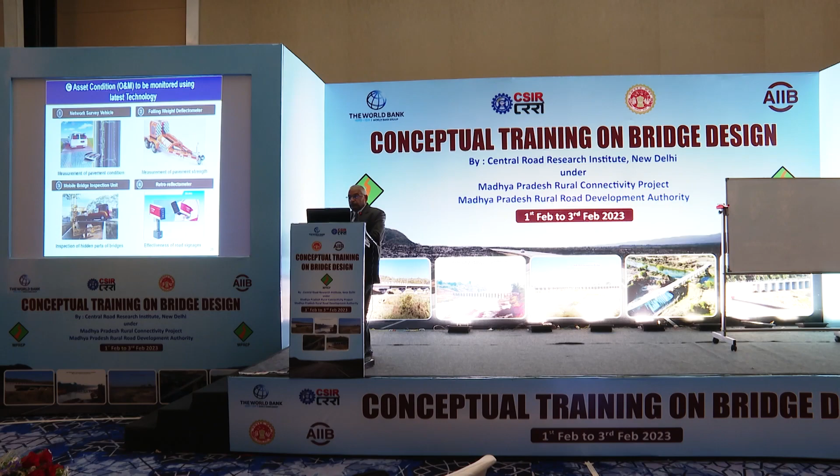This is our patented unit. We have designed it indigenously, and this is being used to inspect the bridges. As I have told you, you cannot quantify or qualify the structure unless you see the structure from your arm's length. You can see the cracks. How will you go? You will go by this mobile inspection unit. You simply cannot say, look, this is good or this is bad. No, it's not like that.

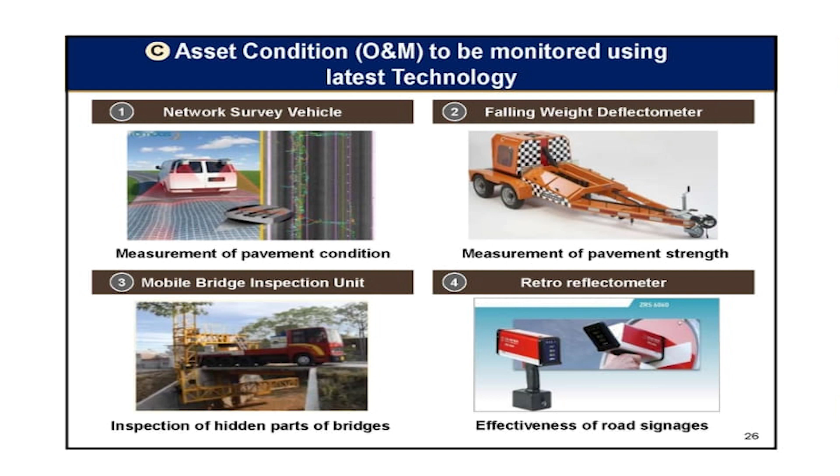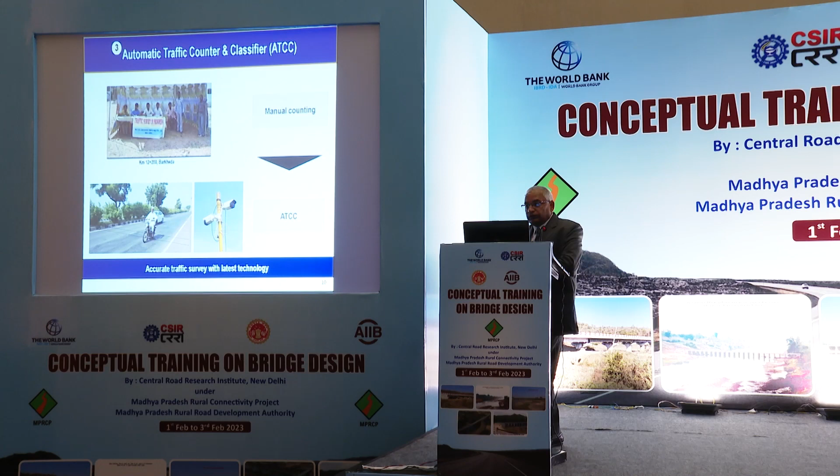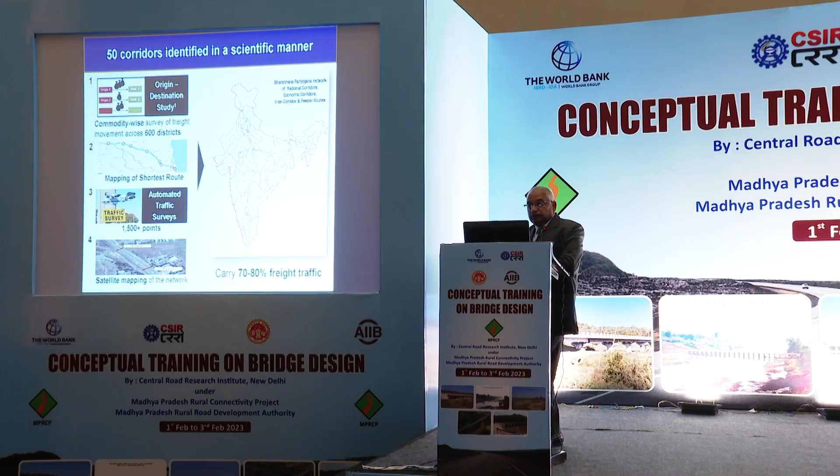Then road signages, effectiveness, reflectometer. So these are all cameras available for traffic counter, classifier. Then these days satellite mapping is done to select the corridors. This is basically the Bharatmala map which has been done. Bharatmala is supposed to carry 70 to 80% of freight traffic. We are planning, but I am not sure.

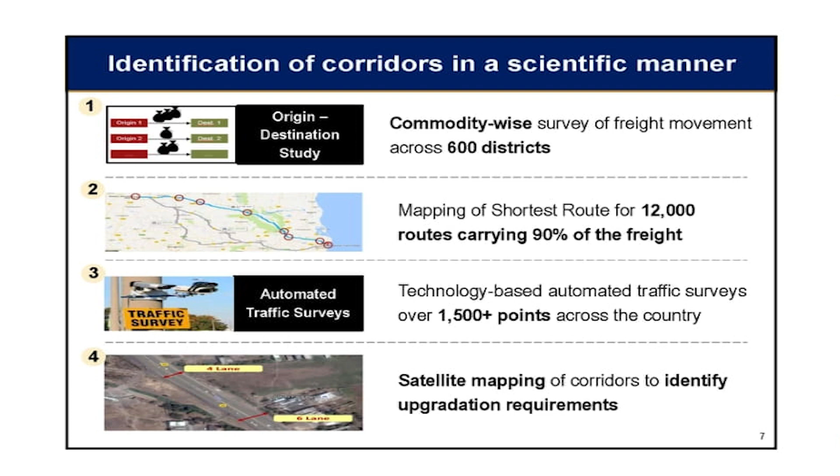Then you can select the corridor in a very scientific manner. If you use all these latest tools and technology, you can select the corridor. Like we have selected economic corridors. Now you see Delhi to Katra, like that. So these are all part of EC, economic corridors. So we are going to have something like 55 economic corridors in our country.

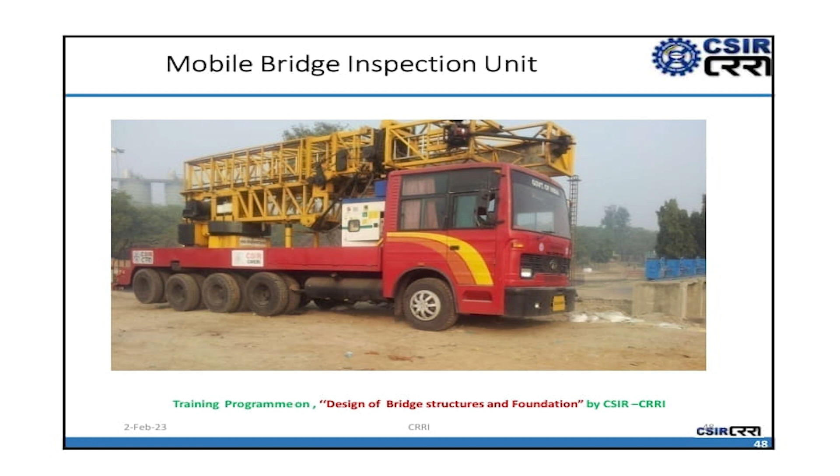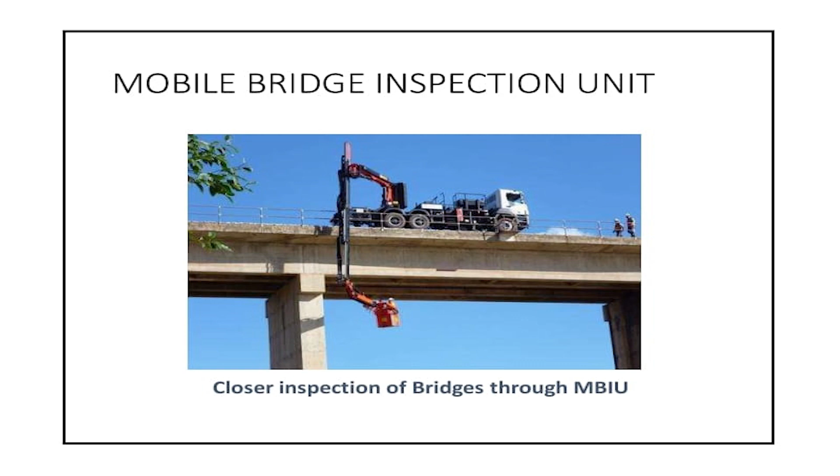This is the close view of the mobile inspection unit. This is our indigenous unit. We feel very proud about it. This is how we have been using it all across the country. There are other kinds of mobile inspection unit, bucket type, but this is not really useful for testing. You can just go for inspection.

Now we have the latest technology using drone, for the components which cannot be covered even by the mobile inspection unit. There is technology now, drone, which can go and take the visual observation. We are planning to have, Dr. Navit is working on it, even certain kinds of testing also, non-destructive testing also.

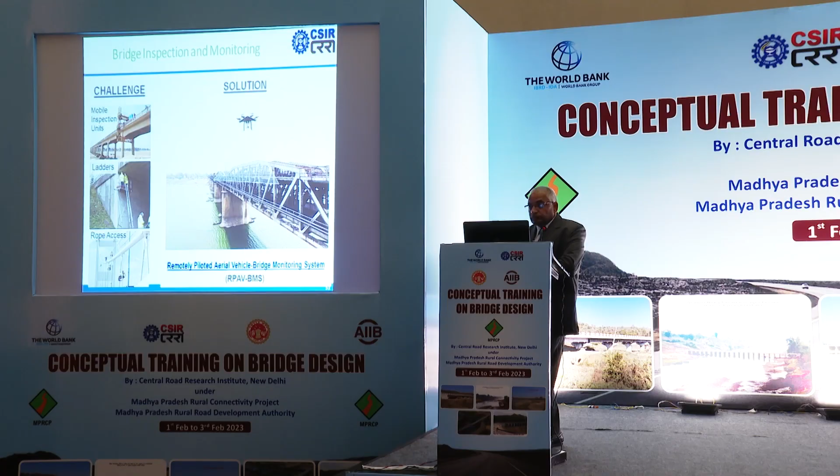And another thing is that for inspection we have the facility available for underwater scanning, because underwater scanning, of course, in India, I'm not sure whether it is mandatory, but all over the world, every 5 years you have to go for underwater scanning of well foundations, wherever the foundations are covered in the water. So with technology and sensors, it is always possible to make the DPR faster, to make better judgment.

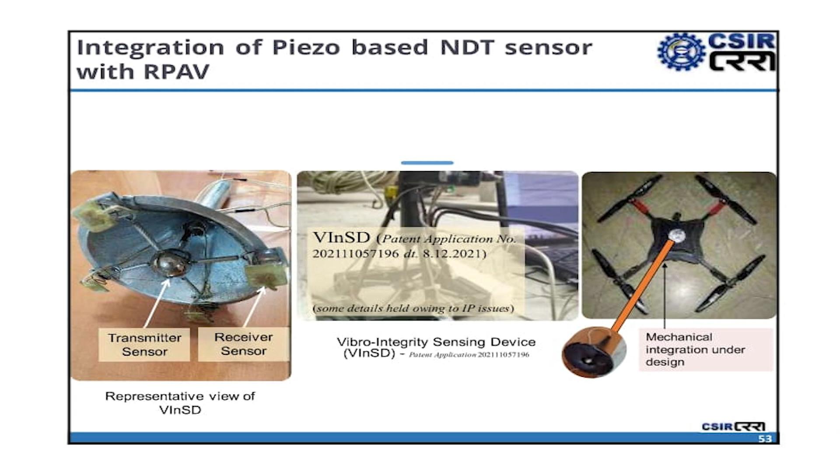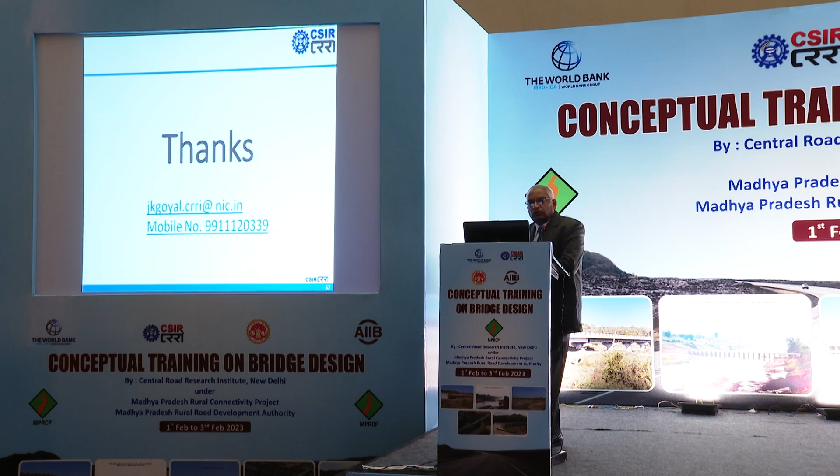Land acquisition, of course, I will not touch upon it. Different forms of contracting I have already covered. So this is basically all I wanted to cover in my presentation, skipping some slides for the future, and whatever I feel important, I have covered. And if you have any question, you are most welcome.